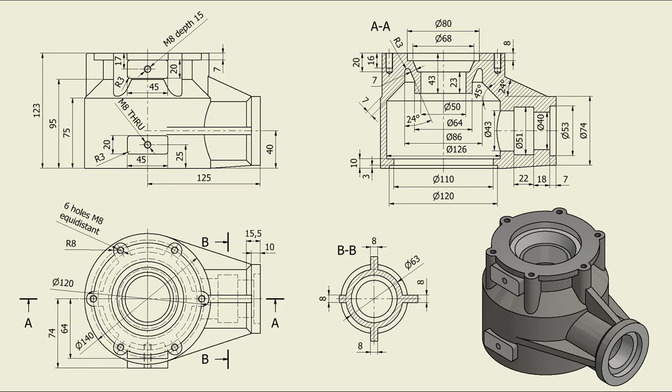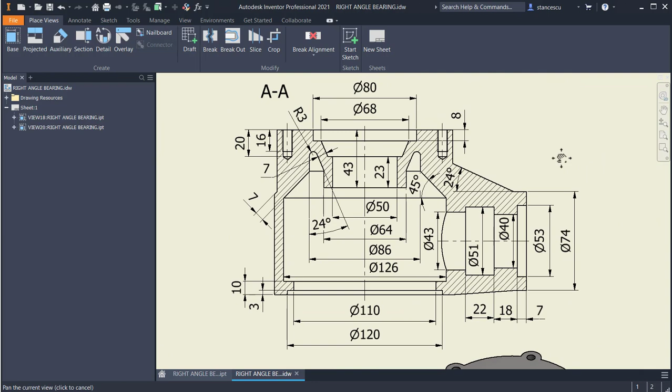Hi my friends, let's model the part number 89, right angle bearing, from my collection of 100 parts. The picture is this. It seems to be not so complicated, and the drawing shows that there are some problems or work to create these sketches, but in fact it is not a complicated part. Let's start.

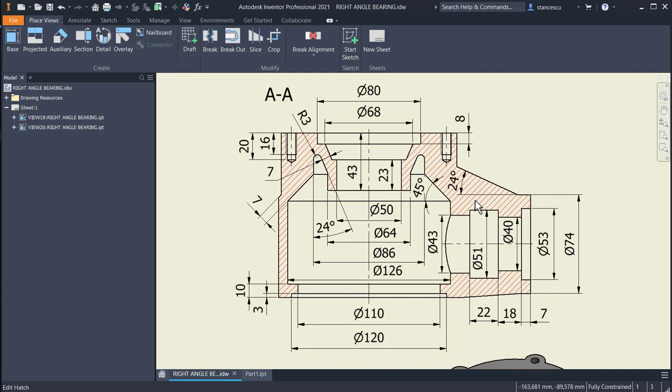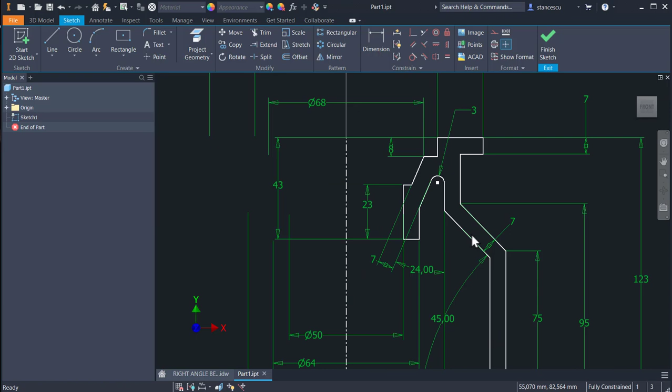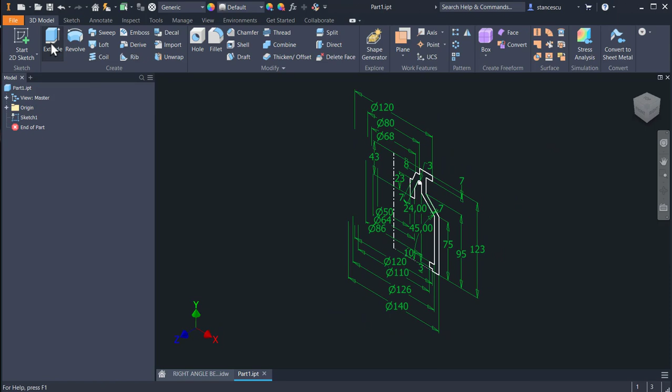So as not to waste time, I prepared the first sketch with these many dimensions. Look at it. This is for you to create. I'm sure that at this level where we are now, you can draw this sketch. There are some parallel lines, angles and dimensions. This is fully constrained, so I'll use it to create the first volume. Take care and make it for yourself as an exercise. Finish sketch, revolve. Okay, this is the first volume.

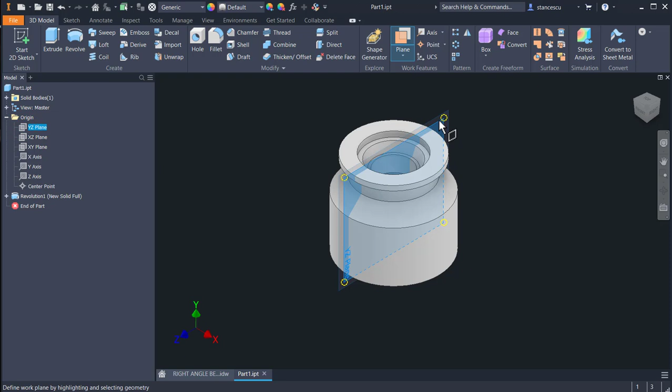Next is this feature, which is a cylinder with a diameter of 63, starting from this end, which is placed at 125. Let's create this extrusion. The circle 63 is placed at 40 from the bottom, 40 millimeters, of course. We start from this plane and we create a plane at 125.

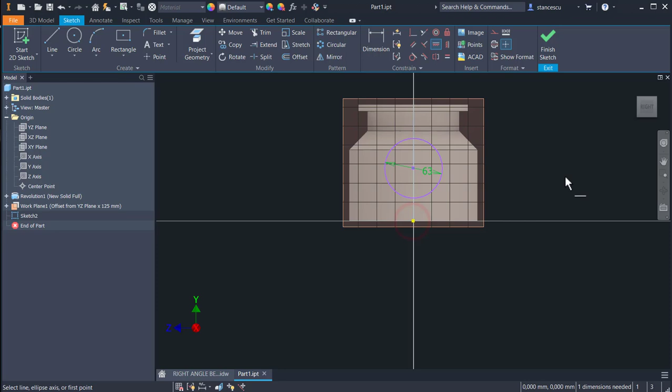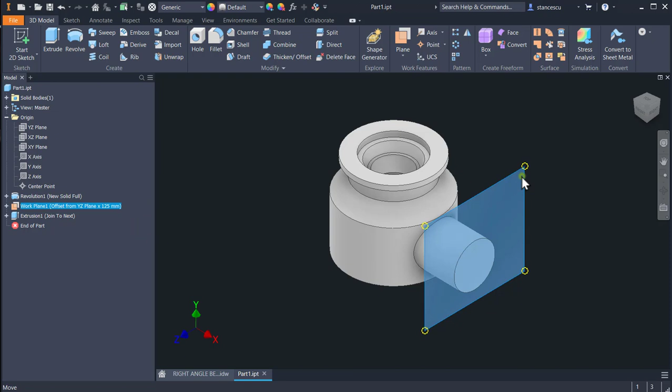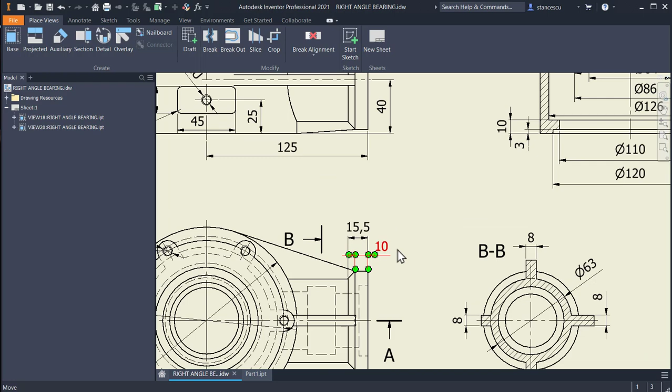Now we create this ring. I can call it a ring. Dimensions are here and diameters are 74 for this generator. Let's create it. We select this plane, F7, we project geometry, this geometry, and we draw some lines, 1, 2, 3, and the closure.

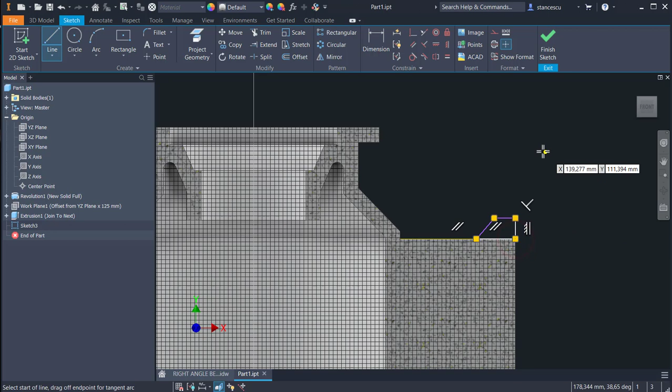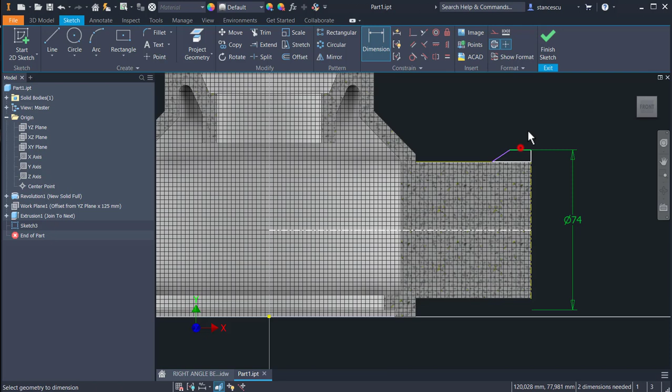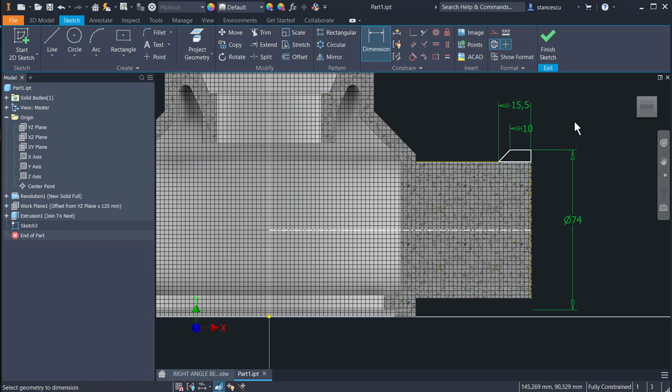Diameter, I have to create also the axis, yes. Center line from this point to the center, yes. And to have this fully constrained at the end, I use the vertical constraint to end this line somewhere. 74, yes, 10 and 15.5. 15.5 is all from here to the line. 15.5. Okay, finish sketch, revolve, axis, adding. Yes, we add volume, we don't cut volume. Good.

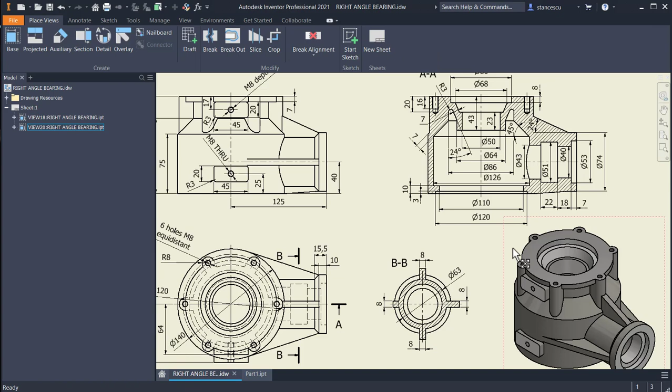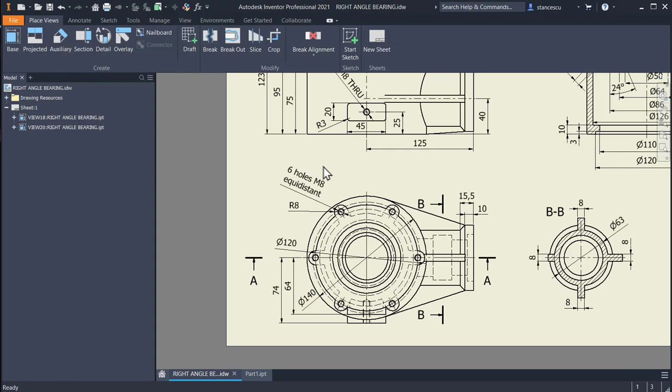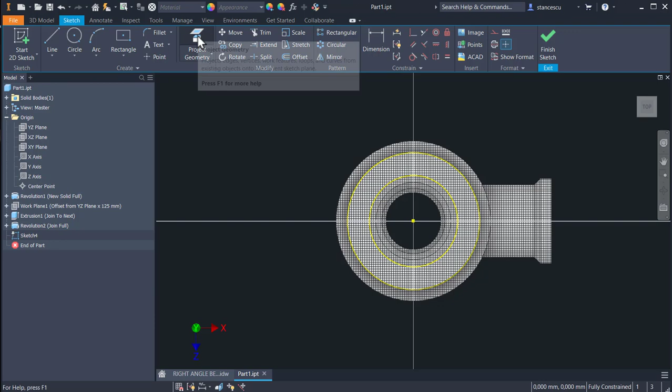Now, as you can see, there are some bosses here. I create one of them, say this one, with dimensions of radius 8, and I have to project this circle, which is this one from here, to have an end for the construction. Let's do it. This circle I project, as I said, the internal circle. I make all of them construction lines,

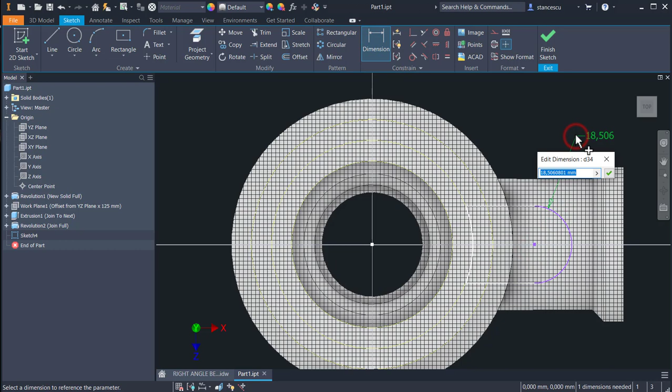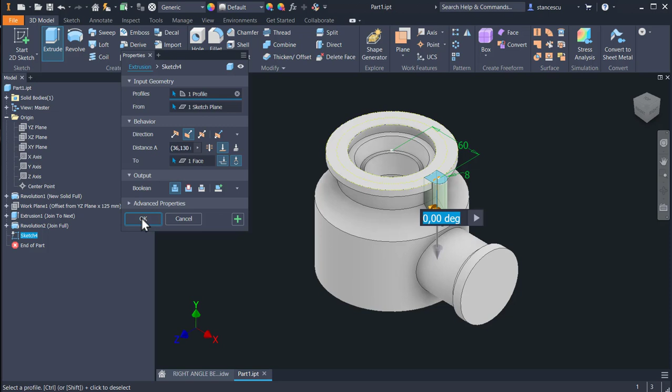and then line from the projected round and also to projected. Yes, I have to apply tangency, I think. Yes, and an arc from this point to this point on the same circle. Dimensions, but first I have to place these two on the same horizontal. This is radius 8, and this distance, as you can see in the drawing, is 120 divided by 2. Finish sketch, extrude to this face with join. Yes, okay, that's all. F6.

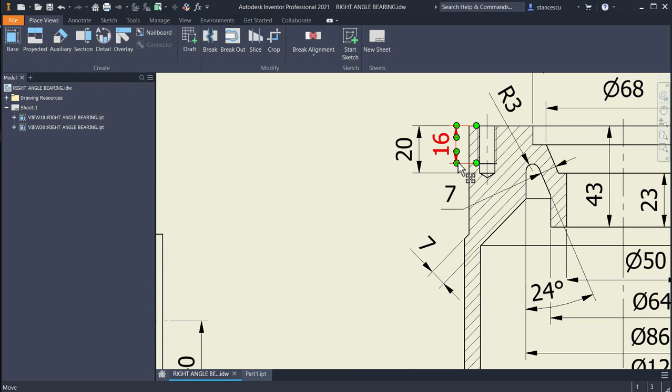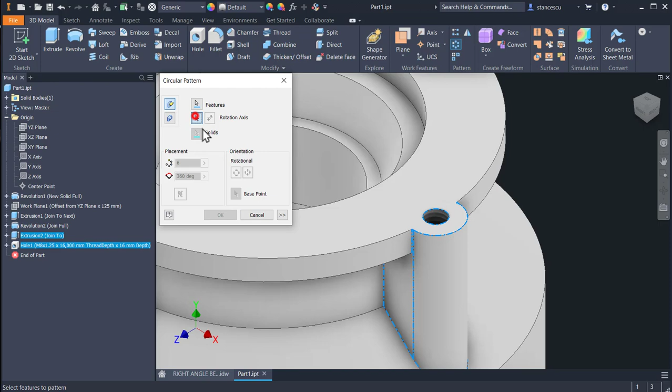Now we place the hole, metric 8, with this definition: 20 the depth of the hole and 16 the thread. Hole, this face, this center, threaded, metric 8, not full depth, distance, the distance is 20, tab, angle, and the thread is 16. Okay. Now we apply circular pattern for both the extrusion and the hole. This axis, 6. Okay. Good.

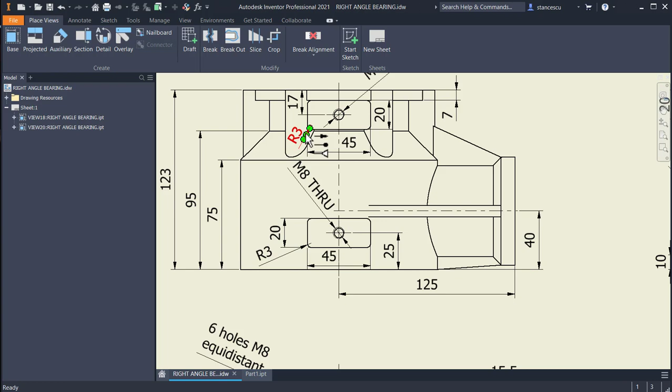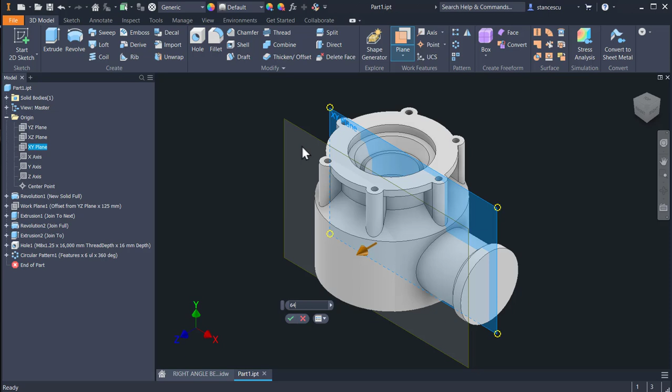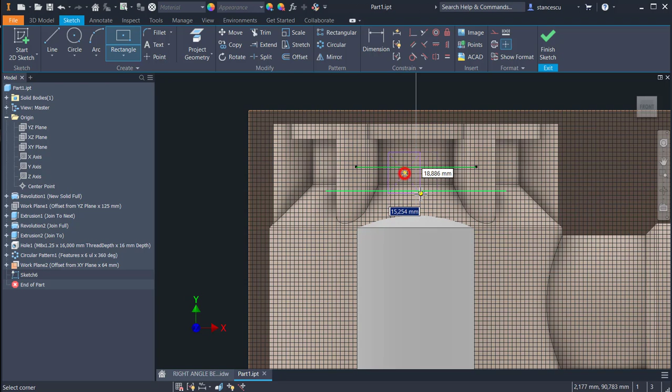Next we see here some faces to be extruded. They are with the same contour, 20 on 45 radius 3, but different distances from the center: 74, 64. 74 is this one. Let's create a plane from this at 64. Sketch, rectangle, this kind, 2-point center. I specially place the center here, and then 45, tab, 20, and now I place this point on the vertical of the center point, and the distance from up to 17. 17.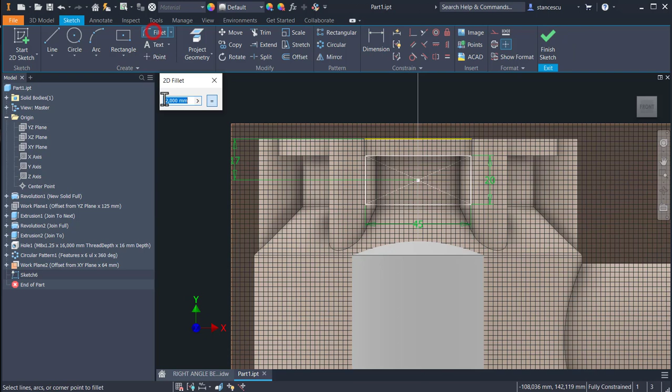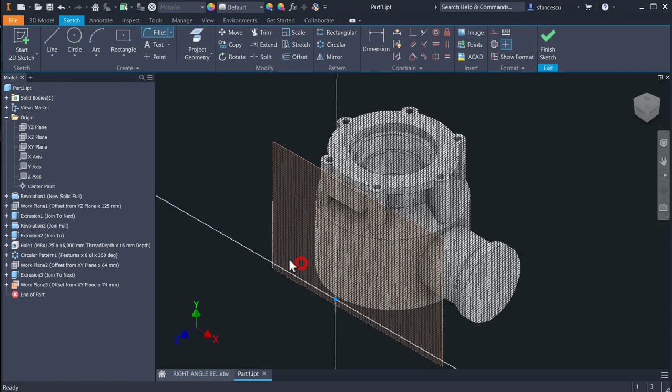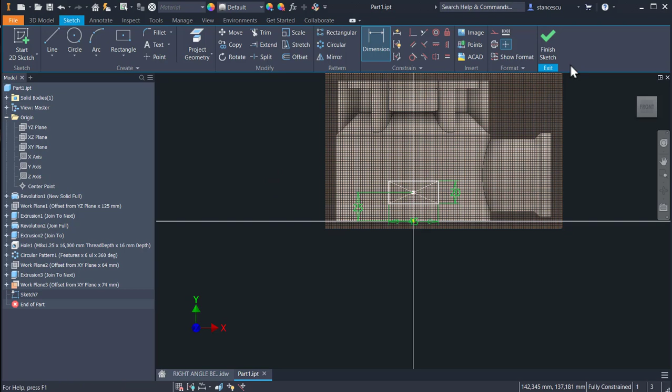Radius 3 for a fillet between all the sides of the rectangle. Finish sketch, extrude to the part. Okay. The other plane is 10 millimeters out, or 74 from this plane. 74. And this one is not necessary, so we use this to create a new sketch which is similar with the other one. 45, tab, 20, same vertical of the center with the center point, and the distance from the center is 25. Finish sketch, extrude to the part. Okay.

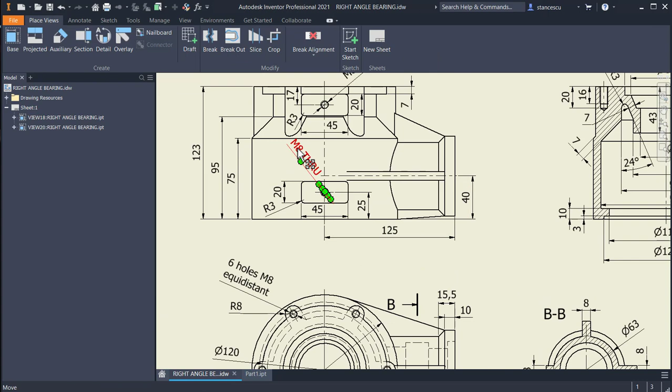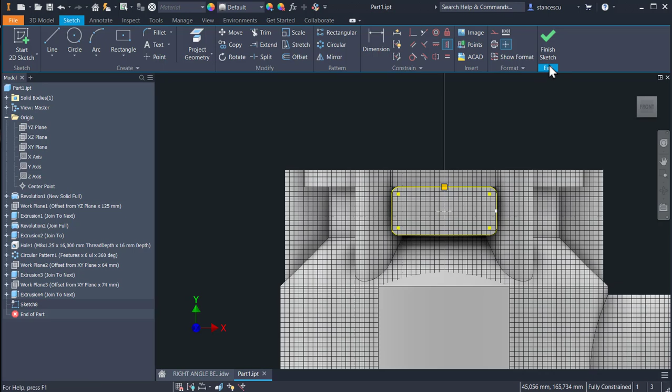They have threaded holes in the center. Metric 8 through, and metric 8 depth 15, which means both depth and thread 15. Let's start with this one. This face, a point, place here on the same horizontal with the midpoint, and the same vertical with the midpoint. Yes, in the center of the rectangle. Finish sketch, hole, metric 8 with full depth of 15. Same thing here,

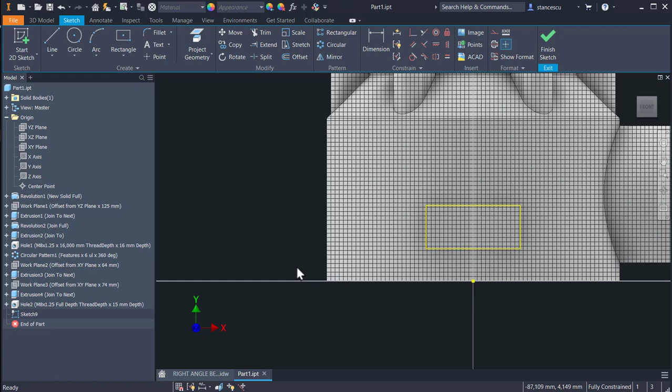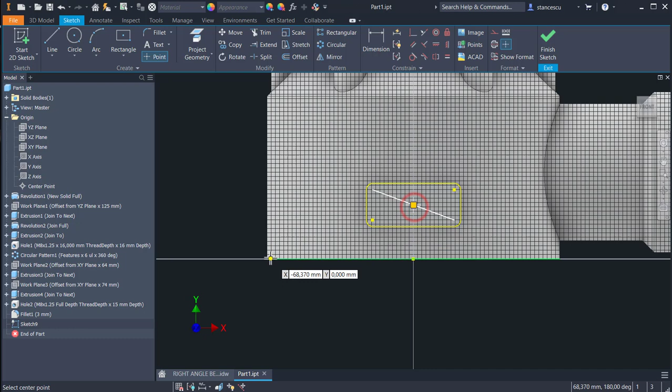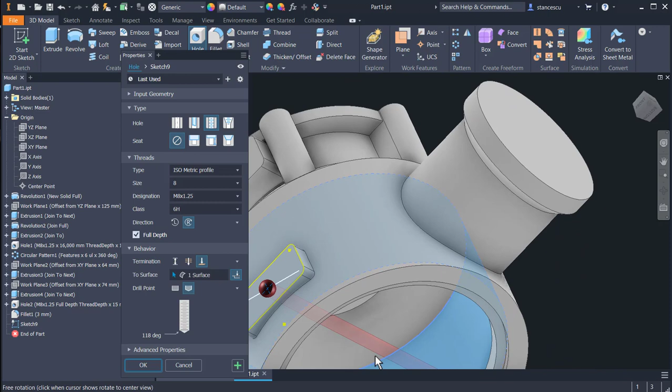Oh, I didn't apply the rounded face. Control Z. I apply the radius 3 fillet. You didn't tell me about it. Yes? Okay, look now. A line from this point to this point, and a point in the midpoint of this line. Another way to place a point in the center. Finish sketch, hole. This is not with a distance, but with a 'to' this face. Okay, F6.

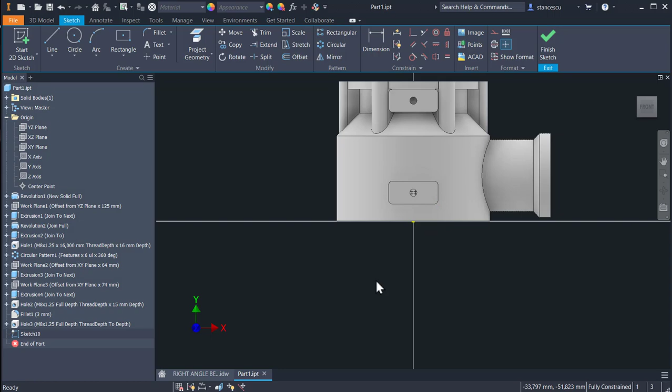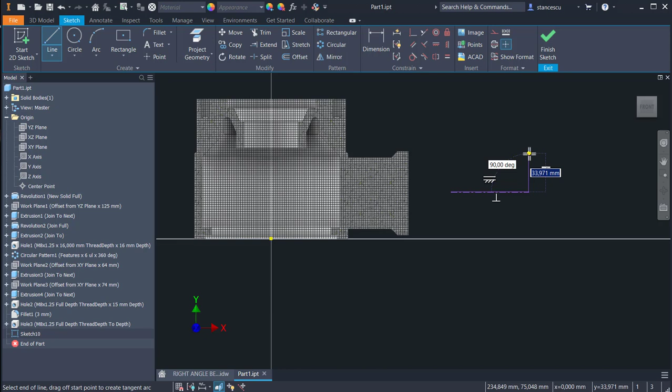Now let's create the hollow inside this extrusion, which is here. Yes? Remember the contour here. So the plane is XY, F7, and we draw the contour outside. This is the center point line, and then normal lines. The contour is as you can see.

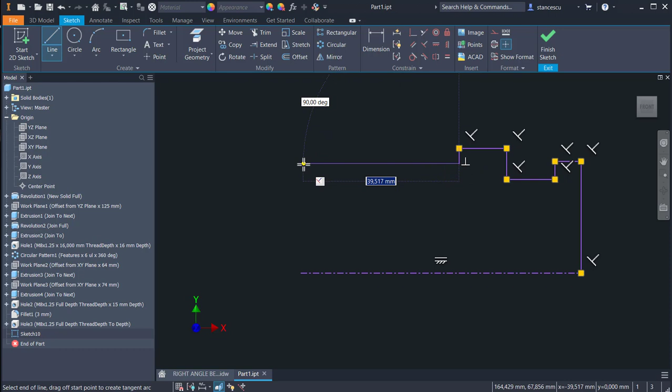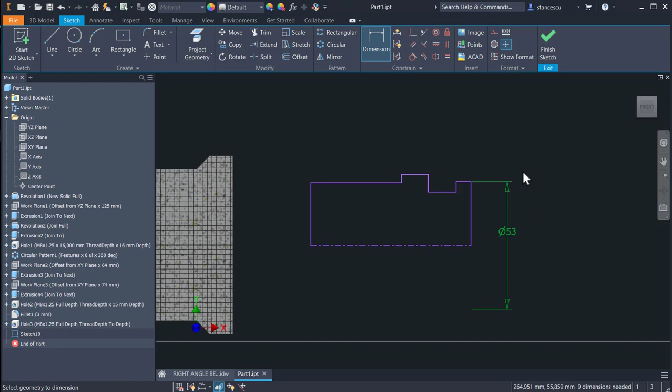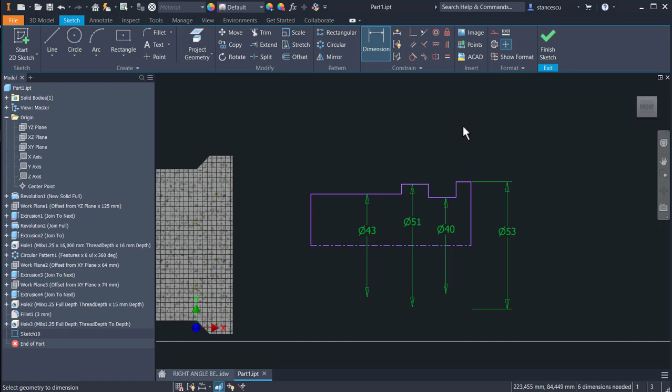Okay. Dimensions. This is 53. Then 40. Next is 51. 43. Yes. Length 7, 18 and 22.

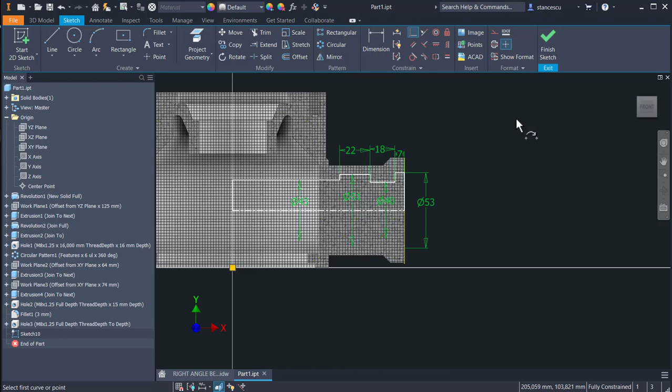Now I create a line projecting this geometry, not the line, this one. I place this point in the midpoint of this line. Yes, and I drag this to be on the same vertical, or coincident this line with the center point. Yes, that's all, my friends. Finish sketch, revolve, cut. Okay, good.

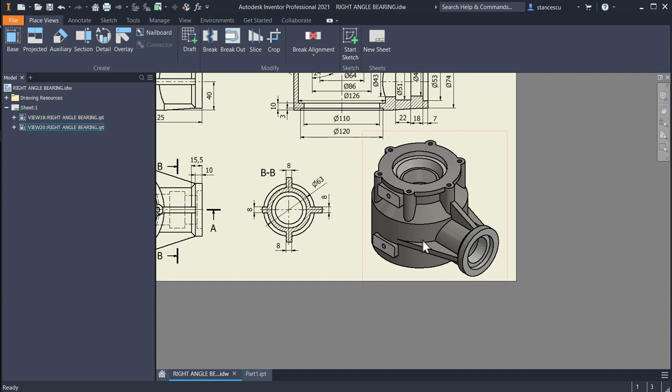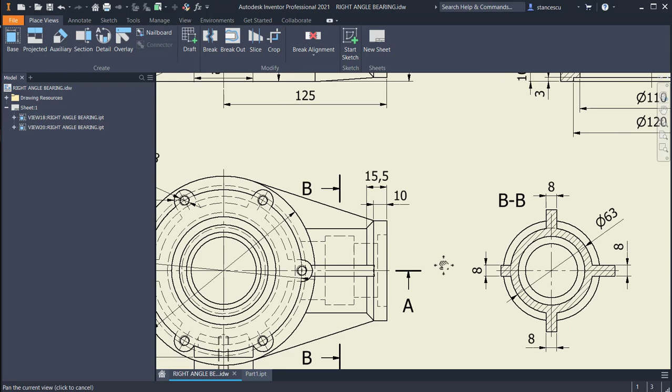Next, as you can see, there are some ribs. 1, 2, 3. These two are symmetrical, and one is at the bottom here. You see their dimension. This is up, this is bottom, and these are on the sides. Yes. So let's create the first one, which is this. Yes. The angle is 24 and the start is in this point.

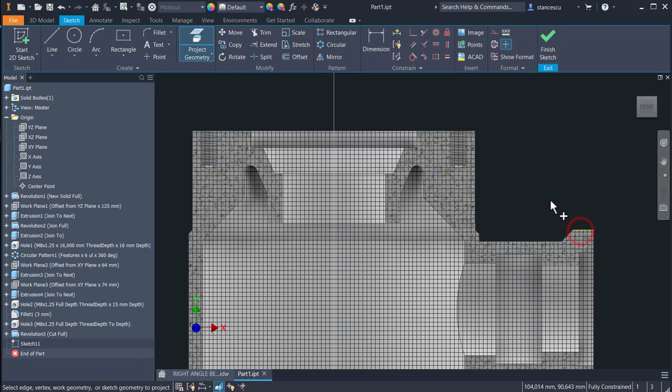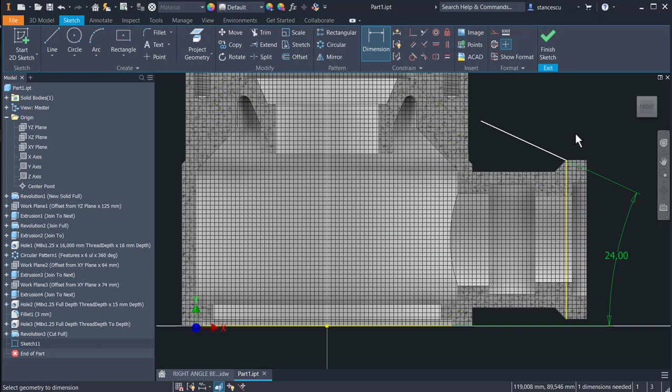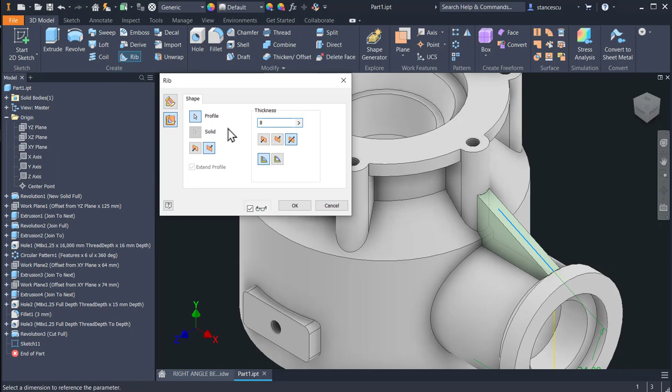Plane XY, F7, project a line, make it construction line, and then a line from here to there. Yes, but the angle is 24. I intend to apply the tool rib, and it doesn't matter where this is finished, but not over the intended zone. Rib, this option, the other direction, and 8. You saw all ribs are with a thickness 8.

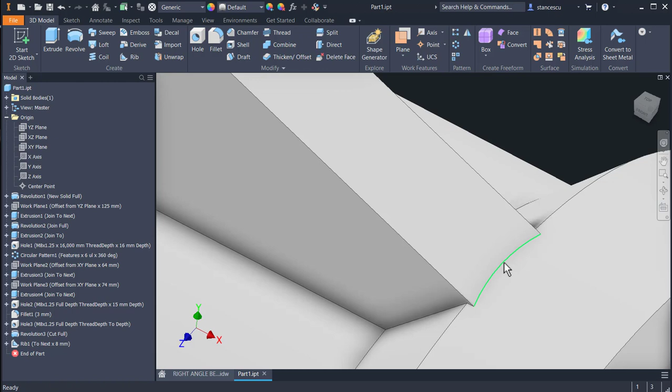Okay, you see how natural and without any problem this rib is placed on the part. This is why the rib tool is a great tool. You see, I started from here. This face is a plane and the intersection with the cylindrical face is curved. Good. Let's go to the horizontal ribs.

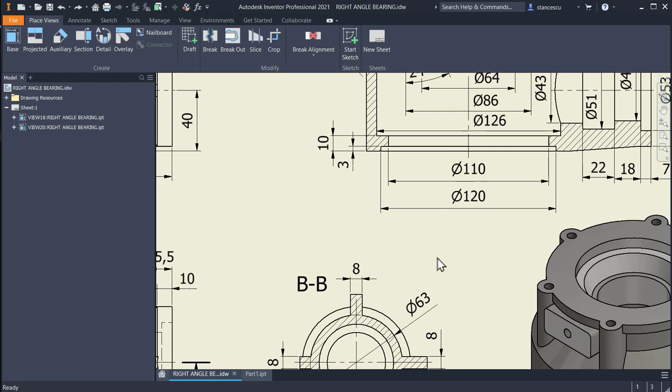We have to create a sketch in the diametral plane of this revolving feature. To do this, I create a plane which is parallel with this one, but which contains a point. The point is created by creating an axis of this face, and the point is at the intersection of that axis with this face. When I click here, the parallel plane will be present. It is not.

Plane parallel with this face, and create a point at the intersection of this face with this axis. Yes, this point is contained in a plane parallel with this one. That's all. A sketch here, F7, with this line, the only one line from here to tangent at the large circle.

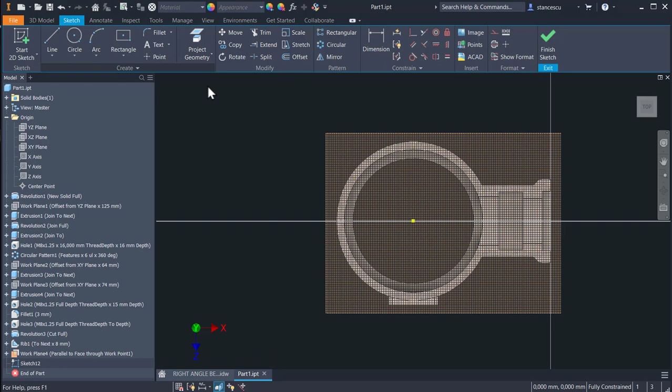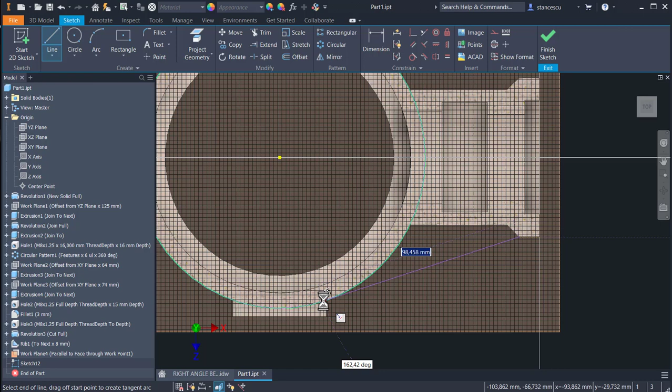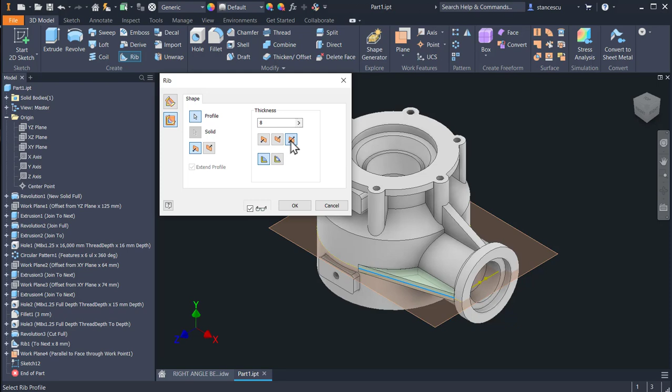Okay, then we have to project this line and this arc. Yes, both of them being construction entities. Line from here to the tangent point. So, finish sketch, a rib, this line, this option, the other direction, and 8 symmetrical. This is the new rib.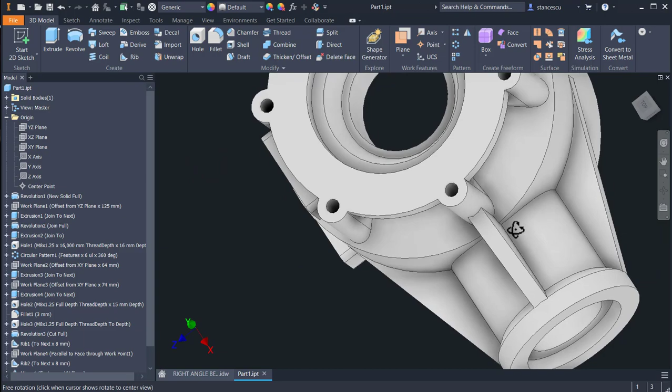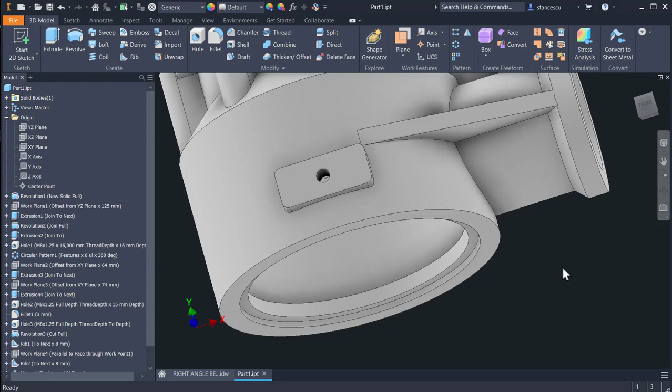We have to mirror this feature about the XY plane. Okay, now we have both ribs. Another rib is here, and I want to warn you or advise you that we cannot create this by using the tool rib. You try for yourself to see if we can or not, if I am right or not.

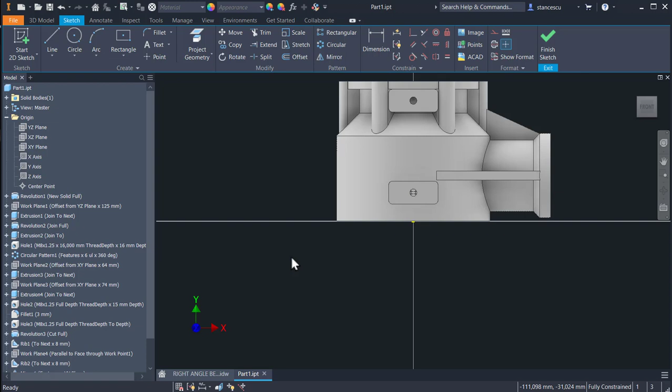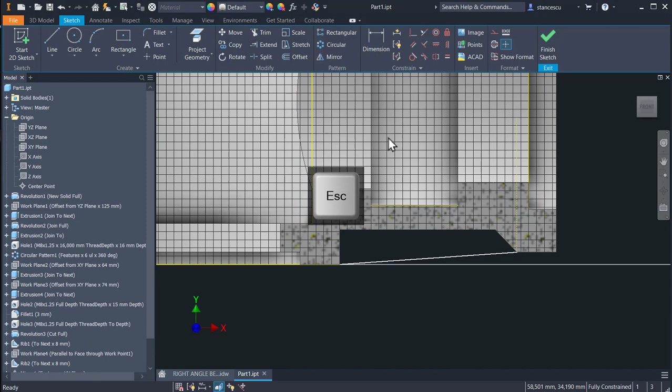We create a sketch in this plane with a large definition of a contour for extruding. Large definition means that the line is from this end to this end, but the rest of the lines are very large here. You will see what I say. For instance, to this and to this and to this must be. I make them all construction lines because now I draw the continuation of the contour.

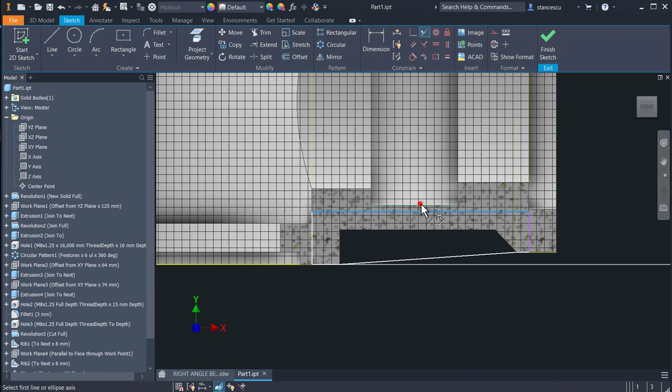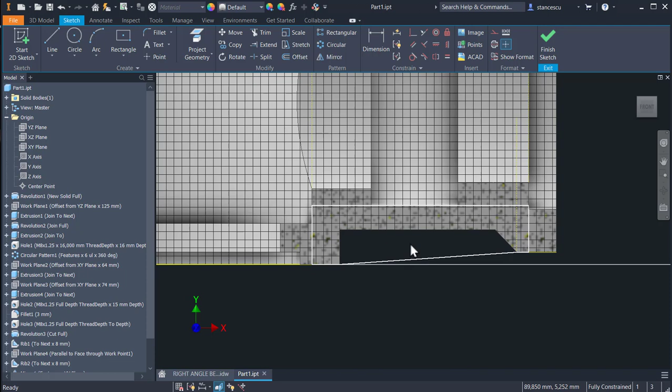This will be after. Now a line from this to this, yes, and the other is from the end to this end. The last is to here, and the very last is this one. We make this coincident, and I am sure that you observe that we didn't place any dimension here, yes, but the contour is very large, not this one, yes, because we have risks.

Extrude, you see what is to be extruded. Symmetrical, which means that we don't disturb the existing elements, but here we do. Yes, I have to finish this contour here. Let's go back. I was wrong. I recognize this.

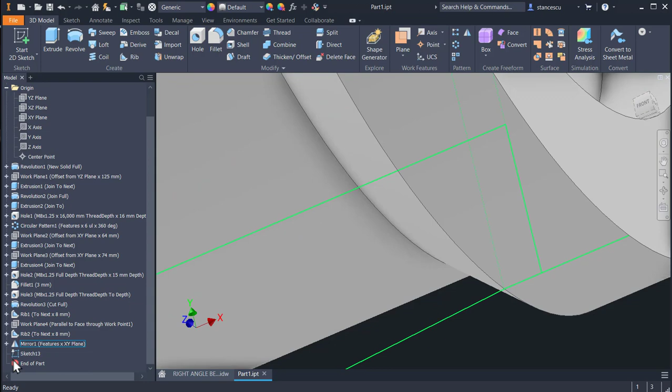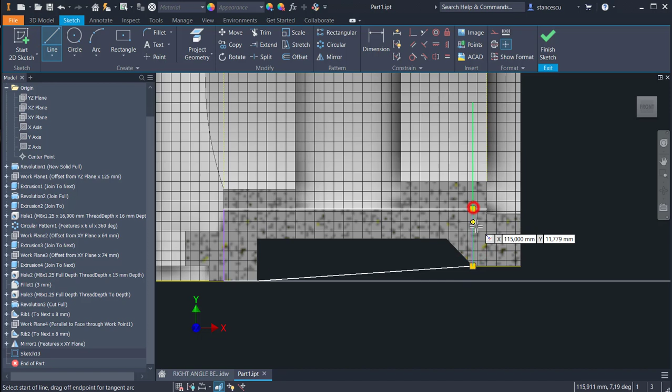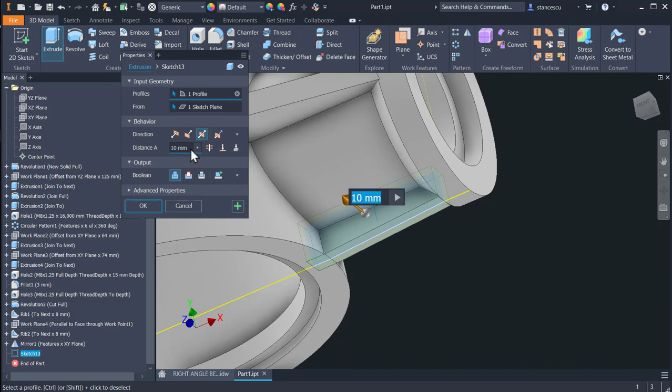So F7, we go to the contour, we cut this line, also this line, and we draw a new line from here to our contour line. Trim to cut this, and now I'm sure that everything is okay because this face is flat. Yes, extrude, symmetrical, 8, not 10. All ribs are 8, and now we have no problems with any other unwanted extension of this new volume.

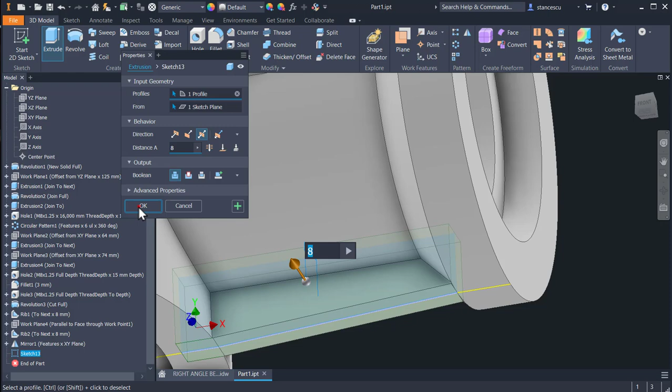Okay, you see, this line is expected, but look here, the flat is extended to the rib because the point is here for definition. F6, what else? Nothing else. My friend, the part is finished.

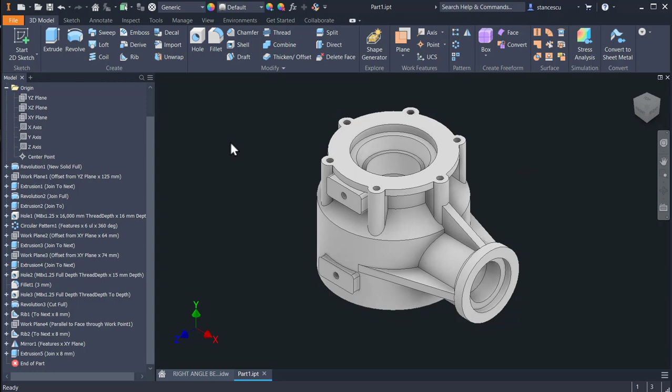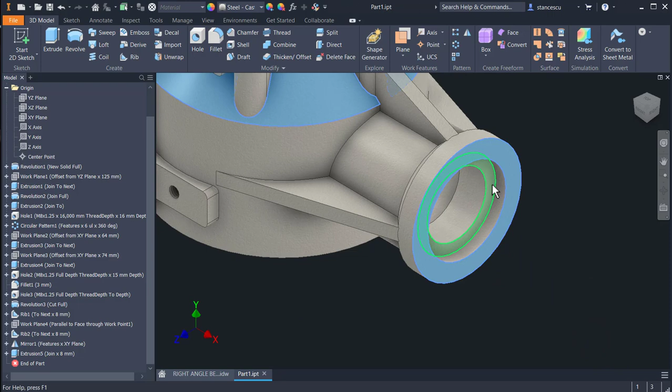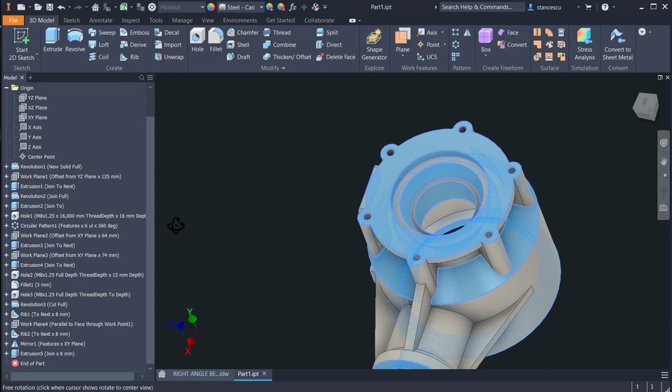Assign material, steel cast, general aspect steel cast, and some faces like this must be machined. Yes, I think that these are okay, and also these two small faces, and also this. For you, I add another one. Okay, steel polished. F6. Properties, physical, update, 5 kilograms almost.